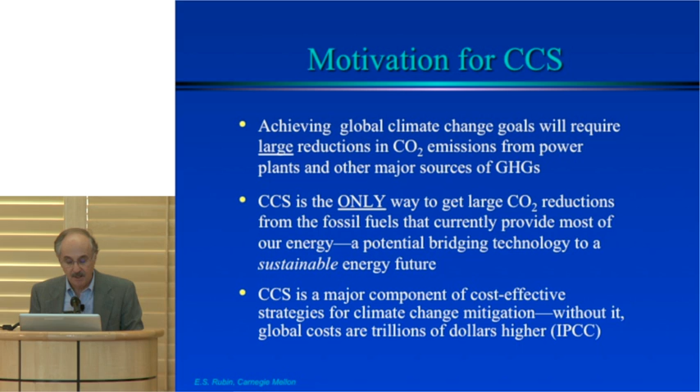CCS also turns out to be a major component in all the modeling studies that are done globally. When one looks at cost-effective strategies to meet climate change, every modeling group who's looked at this shows that without CCS on the table, the costs of achieving climate goals will be substantially higher. Trillions of dollars are typically estimates that come out of that.

So while the focus of this talk is on CO2 capture, we shouldn't forget that it's really part of a capture and storage or sequestration system that has three major components. First, the ability to capture CO2 from power plants and other industrial sources that produce it. Again, the CO2 might arise from coal combustion, but it might also arise from natural gas combustion or the use of biomass, so-called negative emissions.

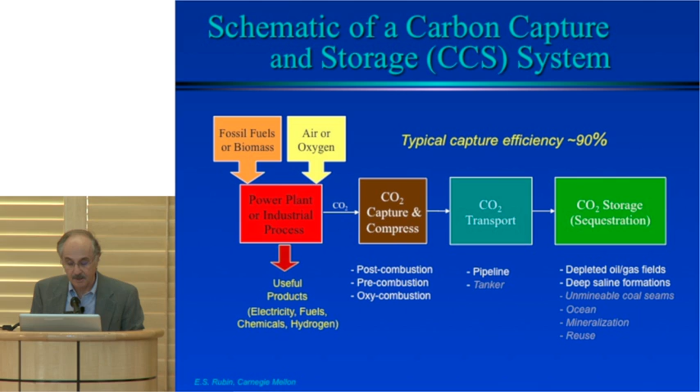In order to sequester or store it in a geologic formation, which looks like the most likely option right now, one has to compress and transport it. And so the compression is typically needed to turn it into a supercritical fluid, essentially a liquid that can be moved by a pipeline to appropriate storage sites.

We're going to be talking about two major approaches. What we can do today, we've talked about, and Ed set this up beautifully, post-combustion and pre-combustion. Here's a little more detailed schematic of what a post-combustion system would look like at a coal-fired power plant today. This is what most of the utilities look like without the CO2 capture piece.

So the yellow box in the middle are a variety of technologies to address so-called criteria or conventional air pollutants, SOx, NOx, particulates, mercury. And if one were to capture CO2 in a post-combustion environment, one would add another piece of technology after that, upstream of the stack. And as Ed indicated, the current technology that would do that job is an amine-based system. We have CO2 at low concentrations and low pressure. So this is a chemical solvent, and its energy requirements are substantial.

The pre-combustion system looks a little more complex. The CO2 capture piece here actually has two components. There's a CO2 capture unit toward the back here, which today would use a physical solvent. So here we have high pressures and relatively high concentrations of CO2. So rather than a chemical solvent, one can use a physical solvent to do that job at a much lower energy cost.

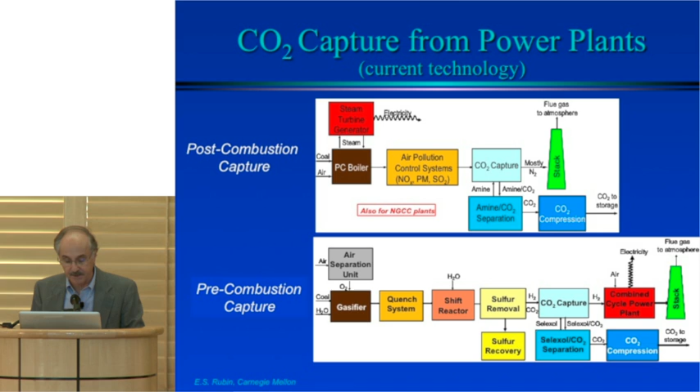Again, the chemical that would be used today, commercially, is called Selexol. It's a glycol-like substance that has been used widely in industrial applications. Here's what some of this actually looks like in terms of hardware. These technologies for both post-combustion and pre-combustion have been used at power plants, both gas and coal-fired power plants, the two on the left, at scales roughly an order of magnitude smaller than a commercial plant today. So these units are on the order of a couple of tens of megawatts electricity equivalent.

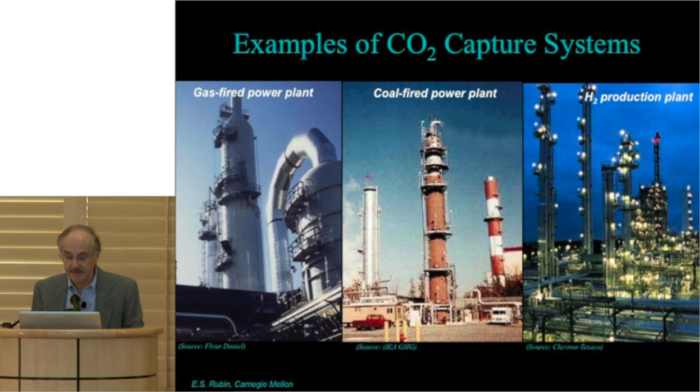Hydrogen production plants, or this particular one, use a Selexol system to essentially do the same separation, except the hydrogen is used to make chemicals instead of electricity. Here are photos of two newer developments. The one on the top is, it would be fair to say, a big deal. This is the first large-scale demonstration of post-combustion capture at a coal-fired power plant. It's what the community has been waiting at least a decade for.

Canada won the lottery on this one. The SaskPower Boundary Dam facility at 110 megawatts. There was an official inauguration on this just 2 weeks ago. The plant started up a month ago. The CO2 capture unit is in the, let's see if I can get the, is this unit in the foreground. So this is now operating at 90% capture, and for the first month or so, so far, so good.

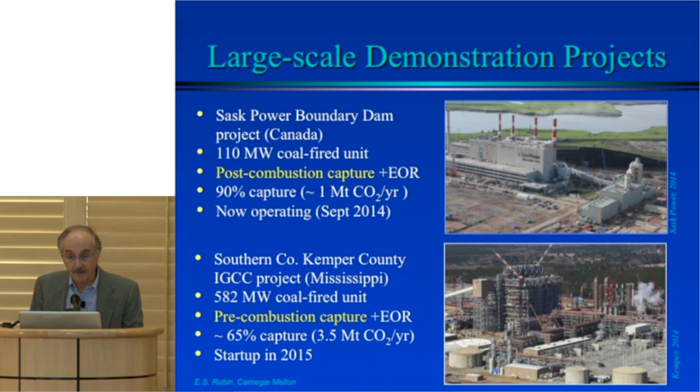The picture on the bottom is a unit still under construction that is now scheduled to start next year rather than this year. It's a large gasification plant that the Southern Company is building, and it will capture CO2 using Selexol as a solvent at a scale of 600 megawatts with about 65% capture. So we're starting to see in these two examples and others that are planned in Europe, the first large-scale implementations of that.

If that's the good news, this is the bad news. They're expensive technologies. To one significant digit in a new post-combustion plant, adding an amine system would increase the cost of generating electricity at that plant by roughly 70%. The incremental costs are lower for gasification combined cycle and natural gas plants, but still quite significant. And in terms of an absolute cost of electricity, we're at different baselines.

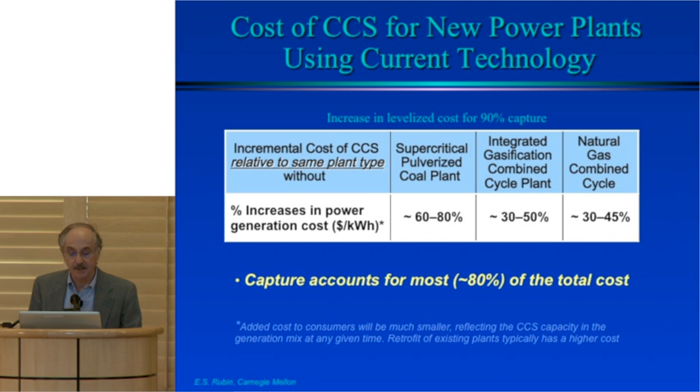We're talking about CO2 capture in this meeting because most of that cost is associated with the capture part of that system. Transport and storage, well, those costs can vary depending on site specifics. They're roughly on the order of 20%. So if you want to make a big dent in CCS costs, you've got to go after the capture process. And there are lots of ideas for how to do that. This is a slide from the Department of Energy showing a variety of options that are being pursued in different scales and some notion of their time frames for success.

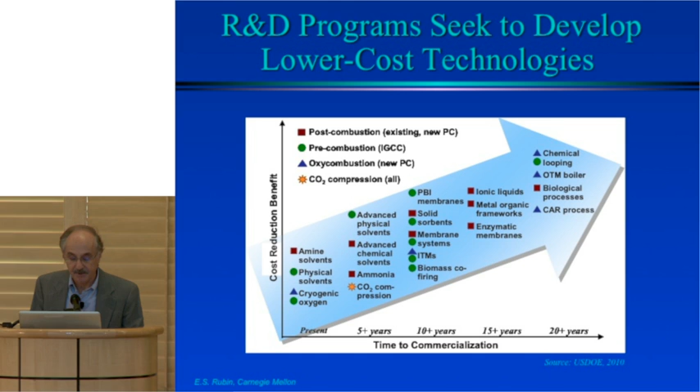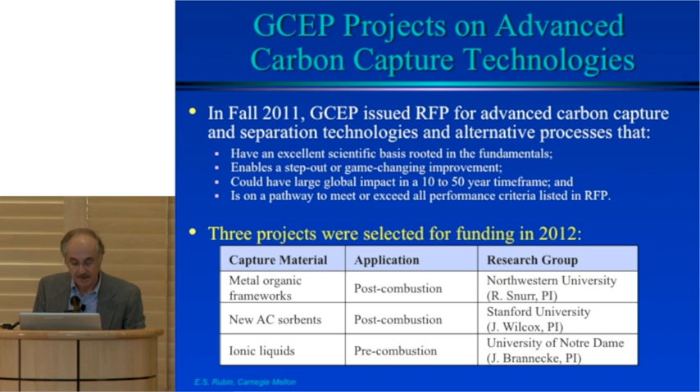I was happy and delighted to see GCEP join that process a couple of years ago. A request for proposals sought advanced carbon capture processes and consistent with the GCEP philosophy, looking for, and these were words, step out, game-changing improvements, big improvements that could have big impacts in the next several decades. And as a result of that solicitation, 3 projects were selected: Ed's project at Notre Dame involving ionic liquids, Randy's project at Northwestern involving metal organic frameworks, and Jen Wilcox's project here at Stanford involving some novel activated carbon sorbents.

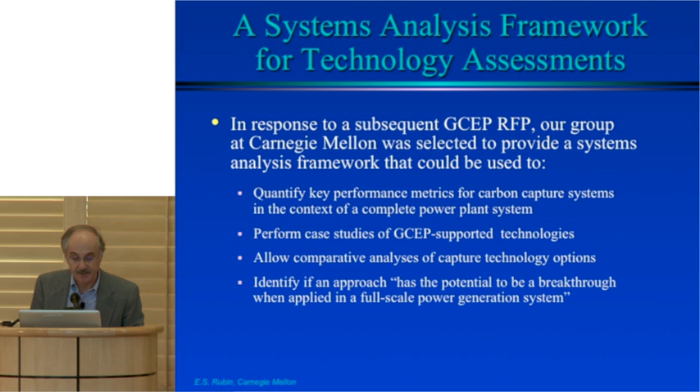So what am I doing up here? A year later, there was another RFP asking for development of a systems analysis framework to be able to evaluate novel processes, these 3 in particular, but others in general, in the context of some rather rigorous criteria that GCEP had put in the original proposal for what they'd like to see in these advanced processes. So we were selected along with Chris Edwards' group here at Stanford to work on a systems analysis framework that could be used to get some quantitative metrics for just how these advanced systems would fare relative to baseline systems in the context of full power systems.

The approach we had proposed and have been following is to build on some prior work we've been doing with a lot of support from the Department of Energy. With that support, we've built a modeling framework called IECM, the Integrated Environmental Control Model, if you Google it. It's essentially an easy-to-use model of a single power plant. It could be coal-fired, gas-fired, biomass, and it basically includes all of the environmental control systems, not only for air, but also for water, because water use is another issue here, and solid waste. So it's basically a full-blown mass and energy balance with engineering economic models and the ability to handle uncertainty.

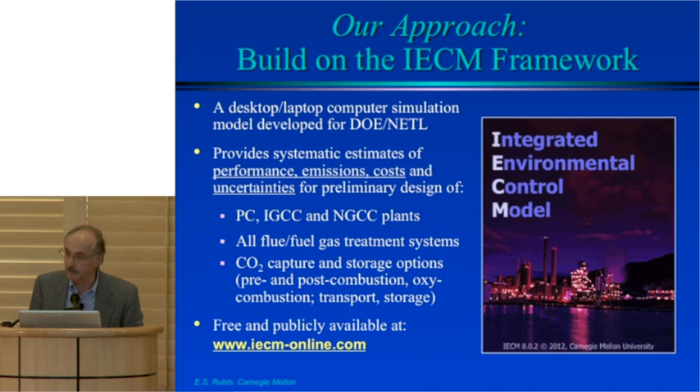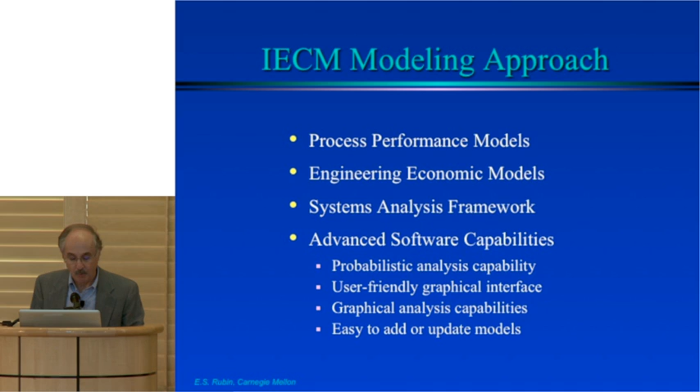We propose to build on this framework as a tool that we and then others could use to ask and quickly answer a whole variety of what-if questions. What if I could create a material that had these characteristics and so on. So the overall approach is basically to couple engineering process performance models with models of cost, engineering economic models, in a systems framework that has a probabilistic capability, so one can look at uncertainties in a fairly rigorous way to identify both risks and opportunities, and hopefully in a package that, again, is easy to use and portable so others can play with that.

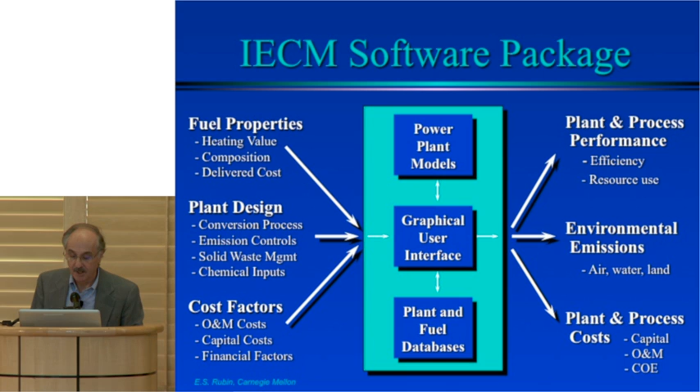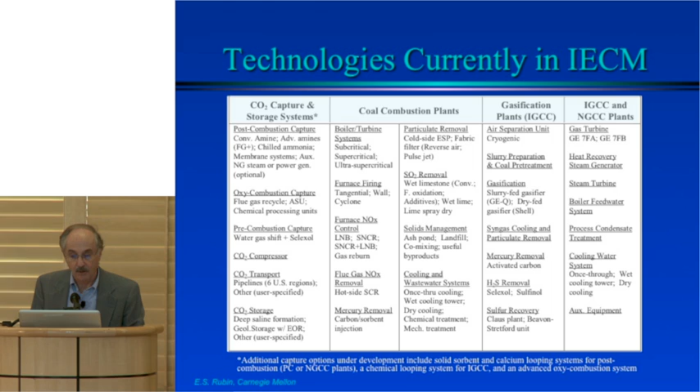So the software package, if you were to download it today, is one that has a graphical user interface behind which there's a lot of stuff. You bring to the model information on the design of the power plant that you're interested in, fuel properties, some cost factors, and the model delivers information on process performance, emissions, and costs. So when this project started, we had in it already a whole suite of technologies, a number of baseline CO2 capture systems that we had worked on, some other things we're doing for DOE, and a whole suite of power plant and environmental control technologies.

And what we've been doing in this project is to work specifically with the three groups that GCEP has been funding to develop new process performance and cost models that could be implemented in this framework and used to assess some of the specific criteria that GCEP put in their original proposal. And these guys have, I think, the biggest challenge ahead of them.

GCEP enumerated 8 criteria. I've reorganized them into 4 that basically deal with performance metrics and 4 more or less with cost metrics. I've highlighted 3 of them: the ability to capture and separate more than or equal to 90% of the CO2, to substantially reduce the energy penalties relative to what they are now, but also to keep the cost low. So it's a perfect GCEP challenge, along with a number of other things.

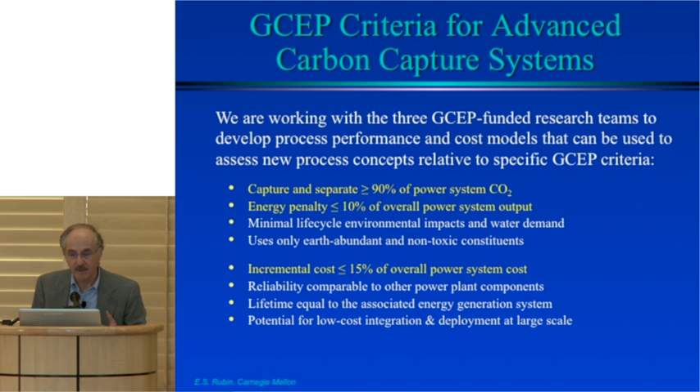So our job is to try to figure out how things are going in these directions, and probably more importantly, to try to use a larger modeling framework to suggest ways that one can move more effectively toward meeting these goals. So let me tell you first about some of the work we're doing. The 3 projects all have about a year left, as does our project. So we're about halfway through the project. So I intended this to be a kind of an informal progress report to GCEP and others.

Let me tell you first about what we've been doing in the area of post-combustion capture. I should say, well, I think I lost a slide here.

I should back up and say first that all 3 groups that I mentioned are still working actively on their materials. So they have not given us the formula, the magic recipes yet for the materials they think will do the best job of that. Somehow, maybe it'll show up later, a slide seems to have been dropped. So what we've been doing is working with what I've called surrogate materials, materials that are similar in nature to the materials that the groups are doing, but they're not the last word.

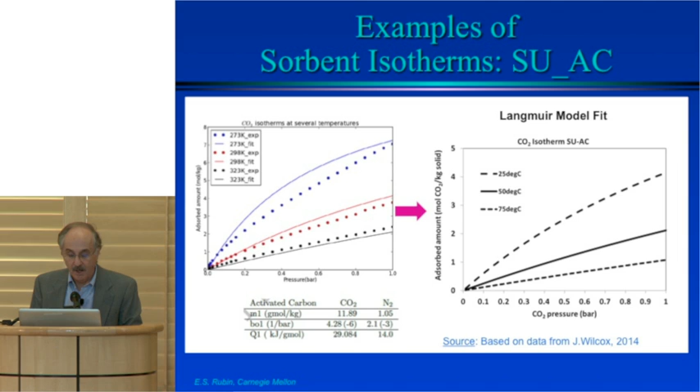So one of those, in Jen Wilcox's project here at Stanford, is looking at, and we heard a little bit about this morning as well, some novel activated carbon sorbents. These are basically solid sorbents that might do the job. So on the left, these data points are some data that Jen was kind enough to provide to us, and the solid lines are fits to that data using a conventional Langmuir equilibrium model that does a nicer job down in the pressure ranges that are likely to be relevant. So what we have basically is a model representation of that.

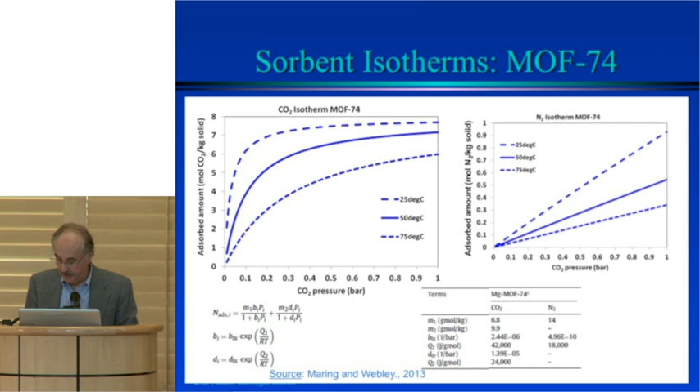On the MOF side, with advice from the folks at Northwestern, we've looked at a number of metal organic frameworks that they believe would be most useful to start playing with. So we've looked at several MOFs. We've also looked at some other solid sorbents, not of either of those types. So I'll show you some preliminary results in a minute based on, this is a zeolite, we'll just call it ZIF 78, isotherms of the sort that Ed just showed.

So here is basically CO2 uptake as a function of temperature and pressure. We'll look at a case study at 50 degrees Celsius, which is a typical flue gas temperature coming in, using isotherms both for CO2 and nitrogen, where you'll notice the scale is quite different.

We wanted to start as simple as we could, and so the first model that we have put together is a three-step process which involves adsorption and regeneration. It's a pressure swing system where flue gas containing, in this case idealized as CO2 and nitrogen, is fed into an adsorber, and then when breakthrough occurs, the system's reversed and there's a vacuum that pulls out the CO2 to give a CO2-rich product.

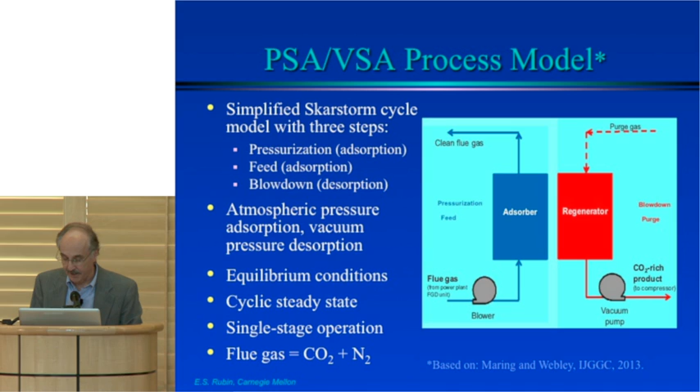One of the things you can see in this system, well, I think I have another slide here. I'm going to skip over the details. It's in there. Here's a better representation. Let's look first at the one on the left. These two lines, the blue line is showing CO2 recovery, which is basically the CO2 capture efficiency, and the red line showing the purity of the CO2 that's captured.

The GCEP target is 90% capture, and for this sorbent at this temperature, the only way to do that is at very low pressures, probably unrealistically low, but those are the numbers that would come out for a single stage vacuum separation. So 90% recovery requires low pressure, and the purity levels also don't exceed about 70%.

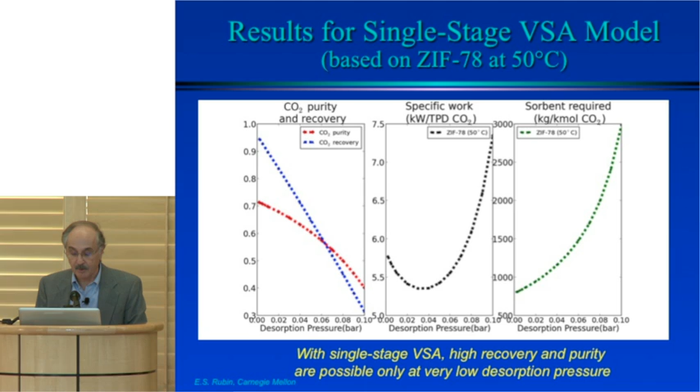These two slides show specific work. This is energy per unit mass of CO2 absorbed and the sorbent required to do that. Again, we need to operate at low pressures is what comes out of the information here.

So we've run a preliminary case study using our IECM framework where we assume 90% capture in a single stage VSA system. We pressurize the adsorber to a little over atmospheric pressure, 1.2, and desorb at this very low pressure, but then compress the CO2 to 135 bar, which is basically pipeline pressures.

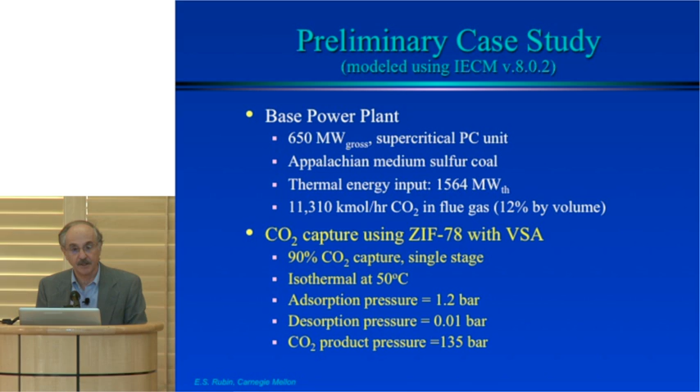And here are some preliminary results. Let me just focus on this next to the last line, which is the net power plant efficiency. Basically, there's a lot of energy needed not only to do the capture, but most importantly, to do the compression if one actually had to go to these very, very low vacuum pressures to do that.

So the result in this case is a power plant which would be 39% efficient without CO2 capture, takes a significant hit comparable to what it would take with a conventional amine system, but also with lower purity, and that would probably not be pure enough to put into a pipeline.

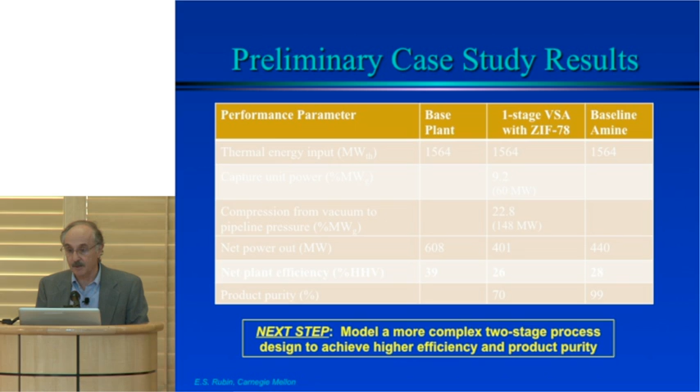So the take-home message here is we need to go back and build a more complex model of probably a two-stage process and play with some additional parameters to achieve higher efficiencies and higher product purity with this system. This was the best of the several sorbents that we looked at, and so other materials would have similar challenges, I think, is the preliminary finding that we come out of here.

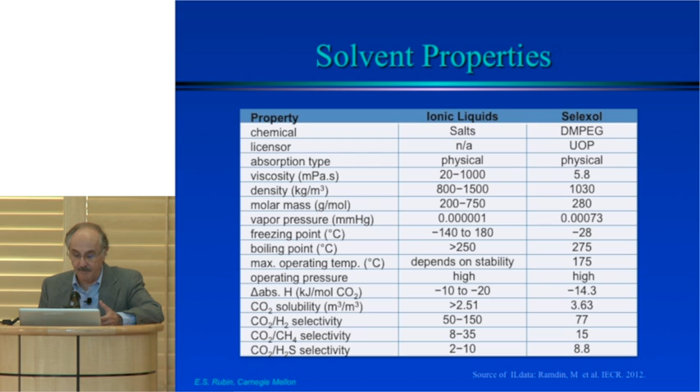We also modeled a pre-combustion system using ionic liquids. Again, we used a particular liquid that was recommended to us by the group at Notre Dame. Here, basically, we're substituting ionic liquid for a conventional Selexol solvent. The process for doing that is the same using either solvent.

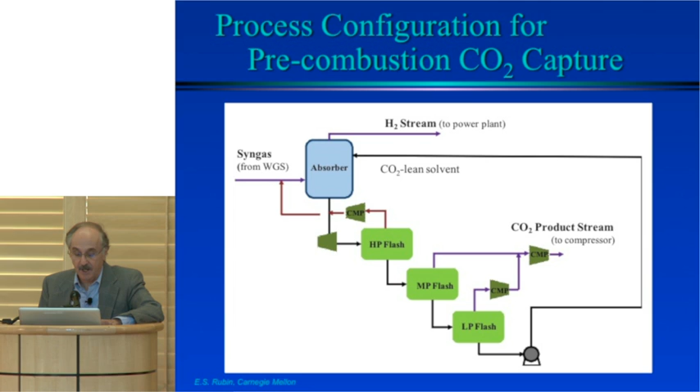So there's an absorber. This is syngas from the water-gas shift reactor, so it's essentially modeled as a CO2-hydrogen mixture. In both cases, we've taken impurities out of the system. And the absorption is followed by a series of depressurization steps in flash drums and recompression to basically desorb the CO2. Again, we use data for that particular ionic liquid, which Ed can probably pronounce and I can't,

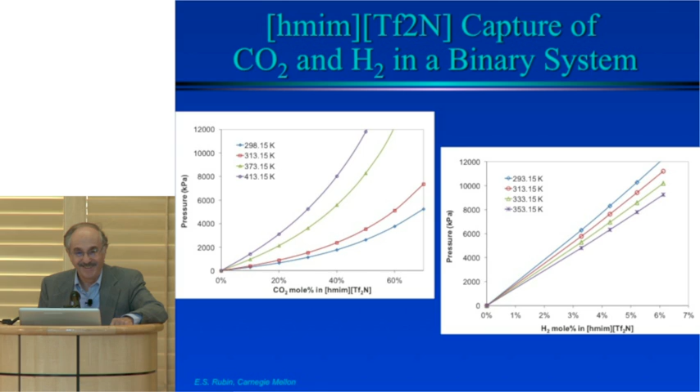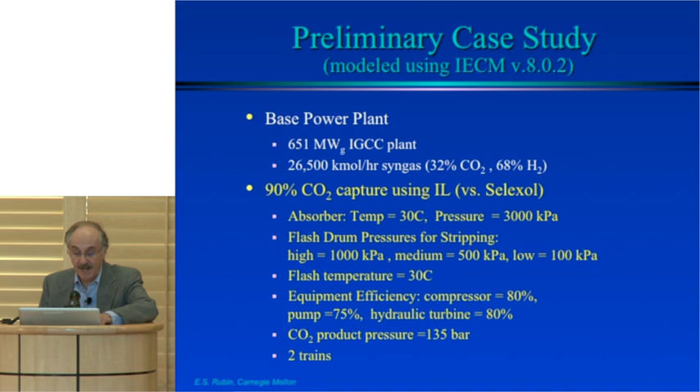and used it in a preliminary case study where, again, we're looking for 90% CO2 capture and taking an entire system compressed to 135 bar with an idealized gas mixture of CO2 and hydrogen. Again, there are details of the process model that I'll put in the presentation, but here's the bottom line in terms of the simulation of the overall power plant.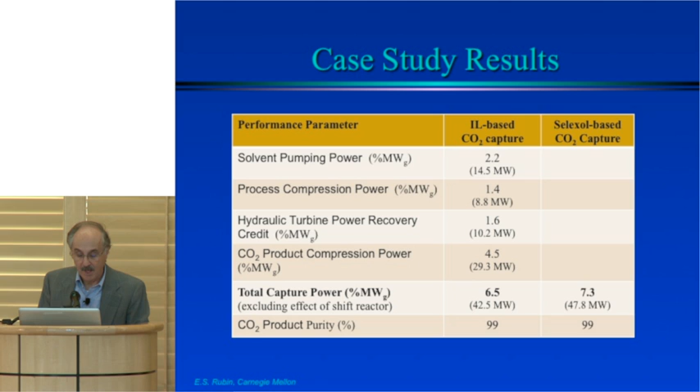This is the power just for the unit I just showed you, and in this case, the ionic liquid turns out to be about 10% better in terms of energy requirements than Selexol. Not a huge breakthrough, but a step in the right direction, and we can look forward to other properties.

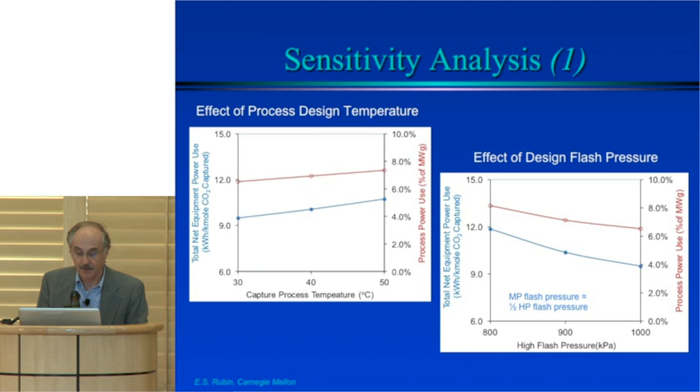Haibo Zhao, who did this work, also did some sensitivity analyses. We're starting to play around with this to look at effects of various design parameters. CO2 removal efficiency: if one backed off the 90% target, moved down to, say, 85%, some things actually start looking better. So there's a lot of playing around that remains to be done.

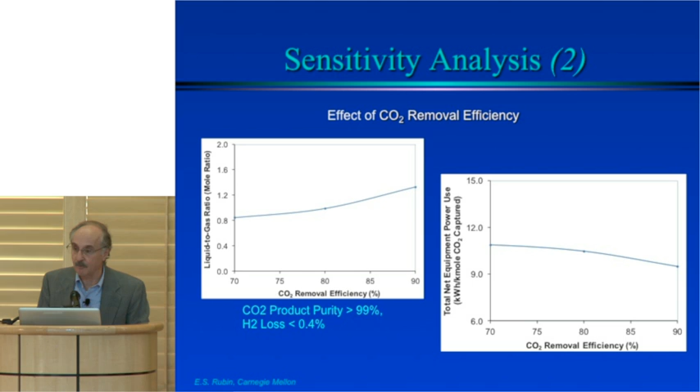I think in terms of preliminary messages that come out of this very early work, we're just underscoring what Ed and others have said, that work on novel materials really has to focus on high selectivity to ensure high capture efficiency as well as high purity.

These have all been idealized simple systems, so we haven't mucked it up by putting any water vapor into either of these. None of these materials like water vapor, and so either you have to design one that is impervious to it or make the system more complex by taking a dehydration step, which is really not what you want to do.

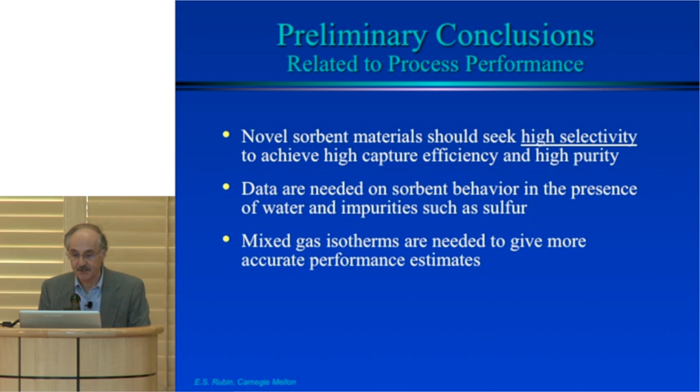So in order to improve the realism of this, we'll need additional data on sorbent behavior in the presence of water and other impurities, and isotherms, not for single component gases, but for mixed gases in order to get more realistic performance estimates. So none of those imperfections were in those results I showed you earlier.

Let me just say a brief word about process cost models. I'm not going to show you any cost results today. We're working on that, still a work in progress, but just in terms of what our approach is and some preliminary conclusions from some other work we finished recently on some other processes.

What we try to do in our cost models is first estimate on the capital cost side what are often called direct equipment costs. What would it cost to buy and install the equipment that one needs to do the capture? What's often forgotten and often handled, I was going to say sloppily, that's not right, with not as much care as is perhaps needed, are a lot of the indirect costs.

So in a traditional cost estimate, after you do an equipment costing, there are a series of other measures, particularly called contingency costs, that are all typically estimated as a percentage of your direct equipment costs. There are some guidelines for how that can be done.

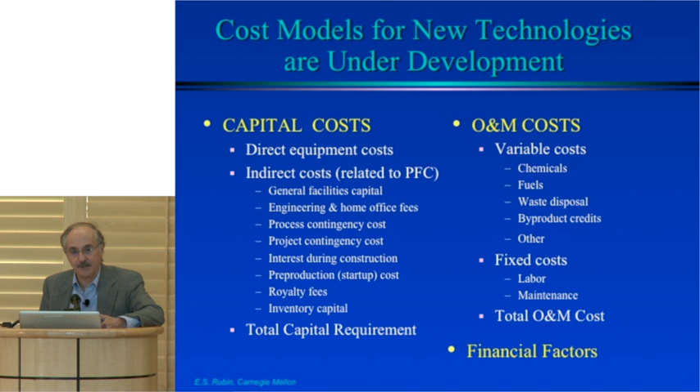In some recent work, I've stuck my head out and pointed out that major organizations who put out these guidelines, like DOE, EPRI, and others, in many of their own studies don't follow their own guidelines and tend to give numbers that are probably more optimistic than they should be for this stage of development. So we want to be careful in going forward.

And the reason is that there's a lot of history that suggests that we tend to be optimistic technologically at the earliest stages of technology development, but as technologies mature toward FOAK, first of a kind, a real commercial reality... While ideally we all want to get to that low-cost nth of a kind plant, you have to start somewhere else. And you can't get to the nth of a kind plant without building N plants. Okay? If you never get past the first one, you'll never get to the nth of a kind plant.

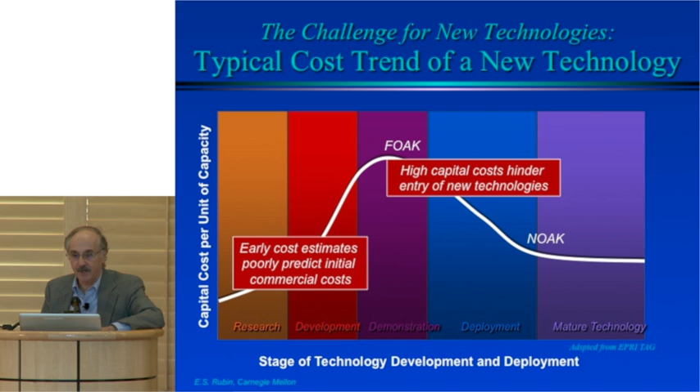What we have found, and I suspect we'll find in this case, is that high capital costs is another major barrier and hindrance to the entry of new technologies. Historically, there's a lot of data to show that we've done a poor job of predicting costs, commercial costs at early stages of development. So we're going to try to do a more careful and more realistic job on that.

But the message that comes from the work we've done so far is that while as engineers we're always after the holy grail of improved efficiency, there are trade-offs. And so there are challenges not only to the technical community in finding and tailoring more appropriate materials, but also to the engineering community at large in finding ways of minimizing the capital cost of these systems, and challenges in terms of how we can make things simpler, how we can reduce the size of vessels, how we can use materials that are cheap and not expensive.

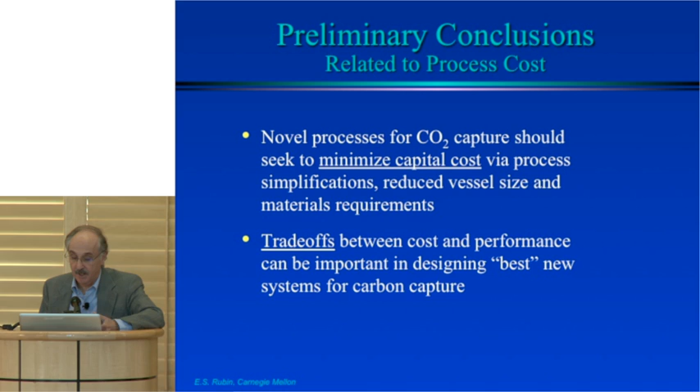Those two sets of challenges, I think, are the ones I will want to emphasize here, and the fact that there are inevitably going to be trade-offs between cost and performance in terms of getting to that next best system. So a lot of the work ahead, we have a number of tasks that we had initially proposed that involve refining models, characterizing uncertainties. I haven't talked about life cycle analysis. We want to ask where a lot of these new materials come from and whether there are secondary impacts that need to be of concern.

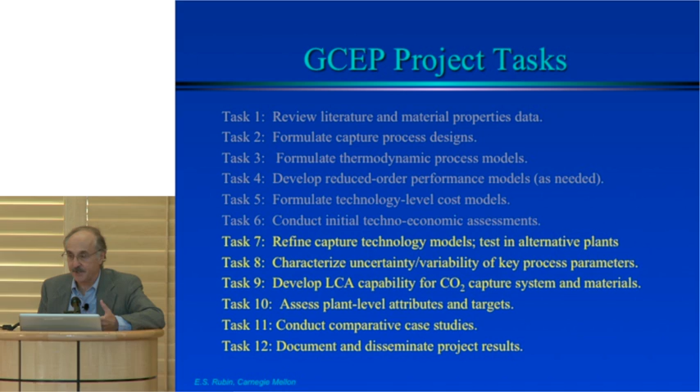What we'd like to try to do is try to reverse engineer our models and come back with advice to the process developers for what kinds of parameters they ought to be seeking, and that will be a major focus of the work that's ahead. So with that, I will thank you with apologies for running over and take a question or two if there is one.

So we have a couple of minutes for questions. Sally? Oh, there's one. Okay.

Thanks. So you said high selectivity is important, but what's high? Do you have a sense of what's high? What would be a target that somebody should be shooting for? We didn't come with numbers. If we go back to some of the data that we showed, it would depend on the particular material that we're talking about. But the basic message is we need to do a better job of getting higher purities on these separations. So when we see 70% as a maximum for that particular substance, those are basically substances that are reported in the literature. It's not what people are currently working on. What you really want is 90 and 90. So what that backs into in terms of the particular parameter, we'll figure that out. But that's what we're looking for.

Over to Paul. The effect of water vapor, I think, is going to be an especially problematic one for a lot of these materials. And yes. So on your task list, one thing I didn't see on there, but you did kind of mention it during the talk, is sensitivity analysis. Yeah. And I encourage you to keep on the sensitivity analysis. That might help with, maybe you don't build the best plant to begin with, but it helps you later on when you get to the nth, you can start to do the 90%, something like that.